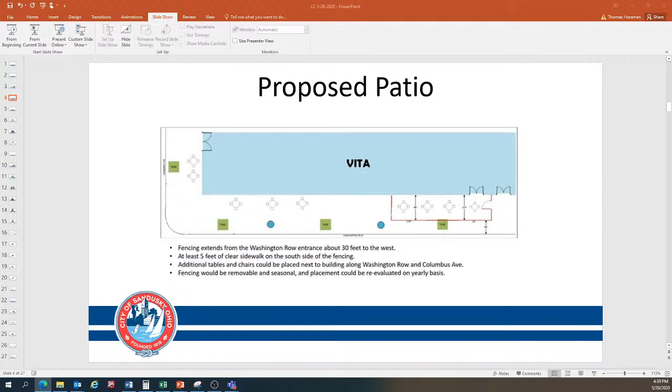Tom, since we're talking about the fence dimensions, could we see that instead of chairs? Is that not on the screen? I'm seeing chairs. No, we're looking at chairs. On YouTube it's showing the patio, but on Microsoft Teams it's showing chairs. All right, well, maybe I should have YouTube on.

Okay, is that showing now? No. There it is, got it. Okay, there we go.

All right, so I can't help noticing that we seem to have a problem with leaving 5 feet for people to walk here. We're talking about a tree grate, but what about the lamppost?

My first impression is, at least one other business is putting 4-tops in enclosures of 6.5 feet. I think I'm seeing more than 60% here. It comes out to 60%.

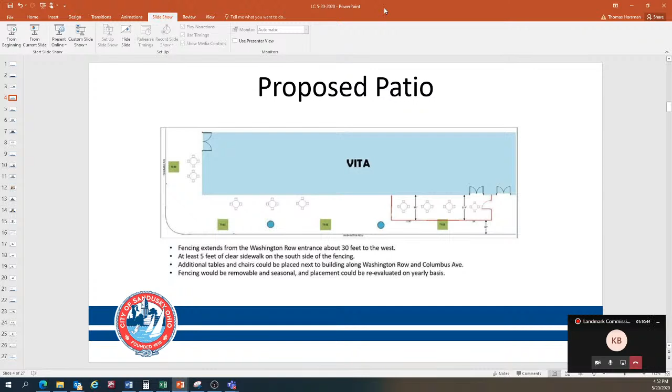Okay, motion passes. Congratulations, Larry. Thank you for helping us. Thank you for your help, and I look forward to working with you on other opportunities. Good luck, Mr. Knauer. Thank you.

Okay, item 4 is 158 East Market Street, the Feick Building. Do we have Lynn Harlan here? Yes, hi Lynn. Anybody else? You also have Mike Marous. Hi Mike, welcome. We're very excited about the building and the plans that you have. So were you on to hear our process? You comfortable with us moving forward? You understand our process, meeting process? Yes. Okay, so we'll go ahead with the staff presentation.

Thank you, Mr. Chairman. This Feick building, a little context about its historic nature. It was constructed in 1909, originally as a 3-story building, which we'll show you a photo of.

Oh, sorry about that. Are you able to still hear me? Yes. Okay, 5 additional stories were added in 1916. It was the former home of Citizens Banking Company.

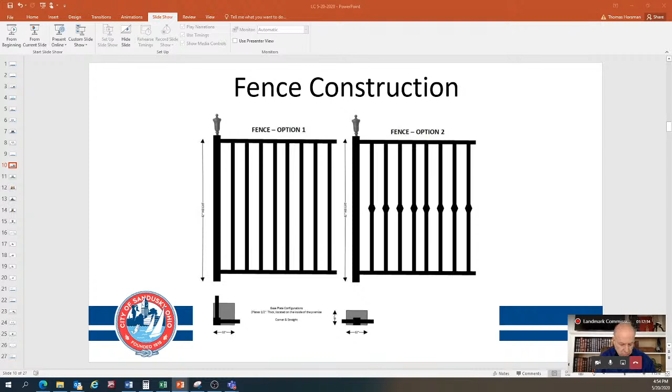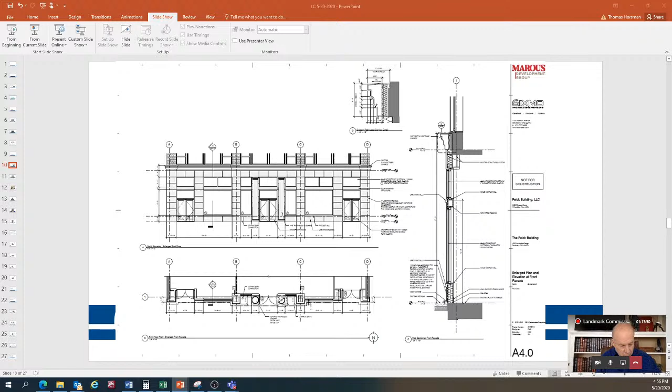And then they also provided elevations for the window replacements along the other elevations of the building.

The components of restoration can essentially be broken into 4 different categories, as I mentioned in the staff report: the reconstruction of the storefront, the general masonry work on the outside, window replacement on the north side - I separated these out as I think they may warrant different discussions - and then the window replacement on the south, east, and west sides.

With that, staff did give a recommendation of approval. We know the applicant did send additional information earlier this week with some additional detail on the windows, and staff did give the caveat that we wanted to have a discussion on the replacement of the wooden windows, but staff is very supportive of the project and recommends approval.

If you have any questions for staff, happy to answer them, and then with more details, I'm sure the reps from Marous would be happy to add more detail.

Since you presented it in 4 different pieces, I would suggest to my colleagues that we take a look at the 3 that have been recommended for approval first, take those one at a time with your questions, discussions, and then any input from Mike and Lynn. Let's go through those 3 first - staff didn't have a recommendation for the window replacement on the north side, so let's save that for last since I anticipate more discussion and clarification from Mike and Lynn on exactly what the plans are. So why don't we start with the restoration, or reconstruction as you're calling it, of the storefront first, and see if we have any questions for staff.

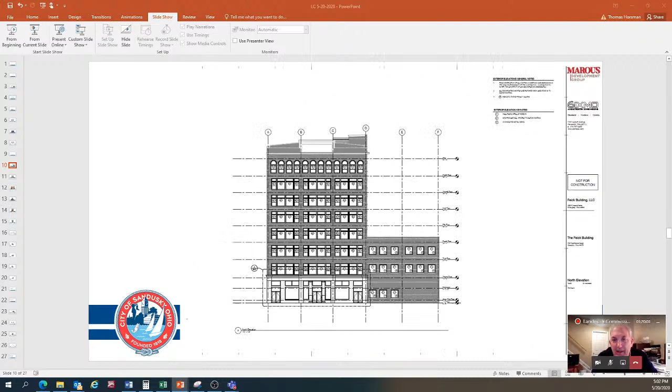Yeah, as you saw in the pictures, there were two different front elevations of this building. We do have a demolition permit, so we started some of the front to see what we had, because we have no drawings as to how that precast face facade was put on. So we started digging into it to see how it was hanging. It's basically just hanging off the building, off angles and a couple of beams. We needed to see that to determine how we would be able to build a new facade. I think the original facade is still back there.

Really? And that's what we started breaking into to see what we had. We'd like to get the rest of it off just to see exactly what we have. I don't think it's creating any structural issue on the building, because the original beams and all under the big second floor windows are all still there.

My concern, for what it's worth, is we went through the concrete block right to the interior elements of the building. So I wonder how much that double layer of concrete block is contributing to supporting the beam, if any. In any event, there's certainly no front left there, because all that's there is concrete block, and I'm seeing Venetian blinds or something. Right? Yeah, that concrete block, I think, was added as a filler to have something to attach that precast to. That's what we were trying to find - what the original structure was, and what we had to take out to get to the new design.

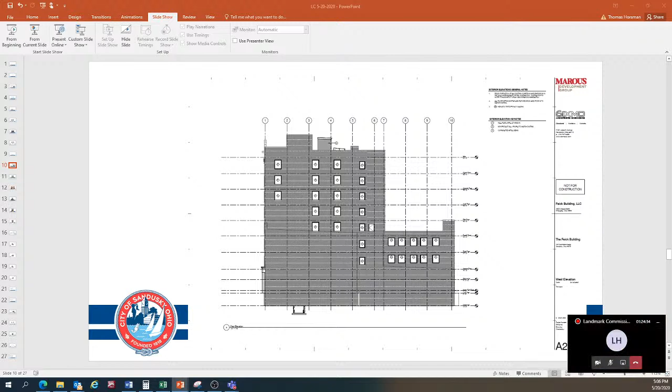Questions from members? Any clarifications? Mr. Chairman, through you, a question for the applicant: is this a tax credit project?

We are working with a company called Energility, putting a package together doing an ASHRAE level 2 to work with to get an ODSA energy loan. So that was all part of the design of this building, replacement of the windows and other interior energy phases. So no, it is not a historic tax credit finance project. Gotcha. Correct, it's not historic.

Other questions? Mr. Chairman, yes. You know, I feel strongly that in this particular case, the iron or steel framed windows contribute strongly to the character of the building, vernacular as it is back there.

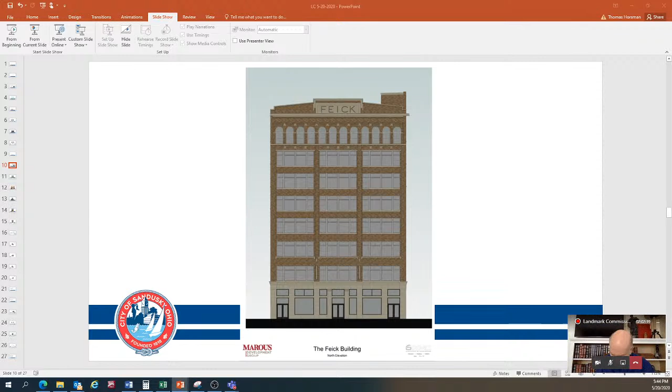Congratulations, Lynn and Mike, and thank you. Looks like you've done tremendous work. Thank you, thank you, good luck.

All right, we're ready for staff updates. Problem solved, Mr. Chairman? Yes. Please repeat. I didn't hear that. We don't have you, Tom, if you can hear us. Oh, I can. Yeah, can you hear me? Yes, we can hear you. Okay, we see your slide.

So for staff updates, the first item is administrative approval of the Firelands Credit Union signage. An application was submitted for a certificate of appropriateness for two sign packages on the Whitworth building, a historic building as part of the City Hall complex. The first sign submitted has been administratively approved; it's a wall sign above the facade, the front storefront of the credit union space, which is currently under renovation for the commercial space.

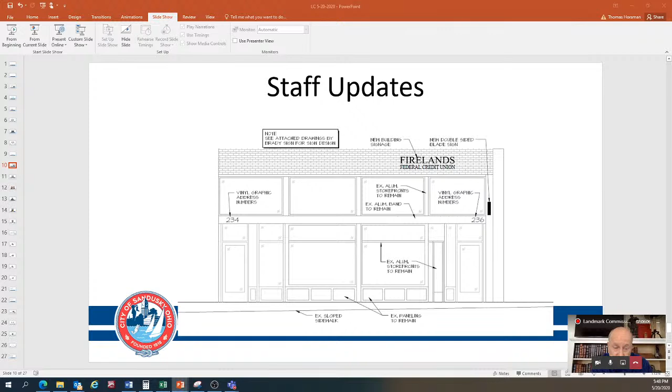Tom came to me with this a couple of weeks ago, and I thought it would be a good example for us to discuss, because we are in the midst of looking at some additional language regarding signage for the historic district. So I would appreciate if you could give Tom some input on this. Do we have Sharon here also with us? Yes, Mr. Chairman, Sharon Tursik from Marous is on the call as well. Okay, so we'll be able to ask Sharon some questions as well. But please, members, jump in.

Mr. Chairman? Yes. I thought I was hearing that this was approved by SHPO. Are we confident that that's accurate? I wonder if we could clarify whether we have verification, or if there's any misunderstanding, or what the meaning would be if it's not actually approved by SHPO.

Through Mr. Chairman, that was indicated to me by the applicant, Ms. Tursick, and she can speak more on that if she's able to.

Sharon? Is she there? I know she was, she was at the beginning of the meeting. I don't see... she's with us. She's there, just can't hear. Maybe she's got her mic turned off. Her mic is not turned off according to the app. Hey guys, this is Ryan Brady.